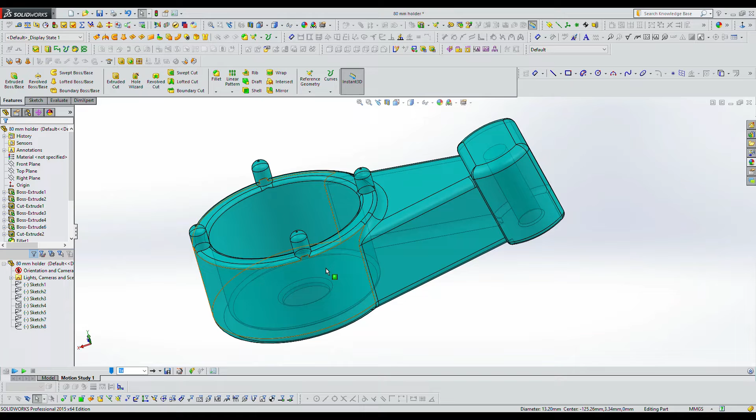Here's a cup holder that I'm designing for a wrought iron chair. This is a model of it in SolidWorks. It's a transparency, so you can sort of see the inner features as it rotates around.

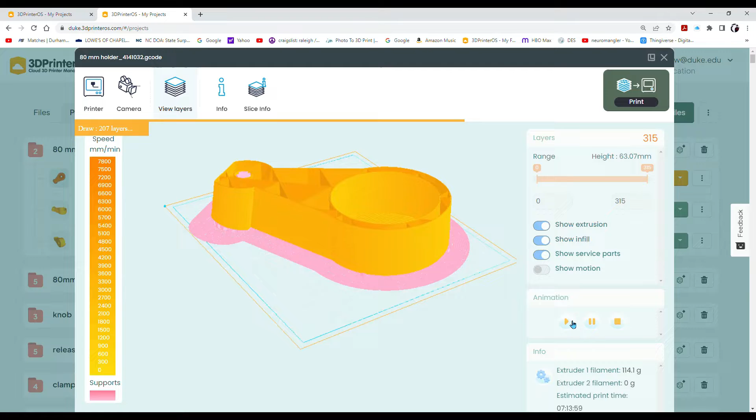Next I'm going to show the 3D printed simulation of the part. It's called the 80mm holder, due to the inside diameter of the cup holder. It's also got a little angle to it because the part that it clicks onto on the wrought iron chair is at an angle.

So here I'm just starting off drawing it on the fly. I'm making the inner diameter, of course it's 82, giving it a few millimeters extra. Next I'm extruding it. This is the basis of the design here.

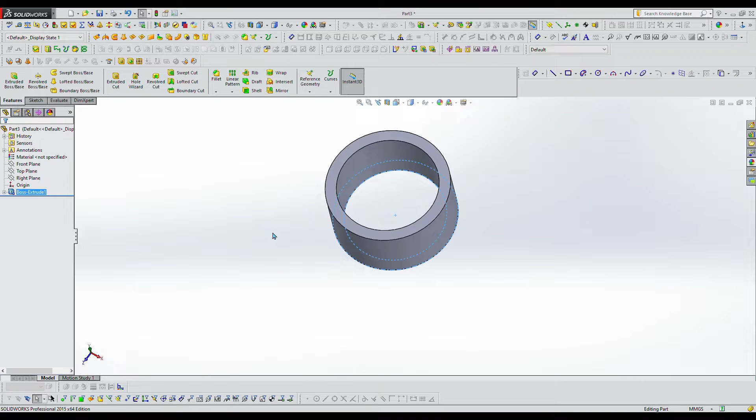Then next I'm going to be drawing the angled attachment for it. So here I'm drawing some lines that I can reference, and I'm going to tell that to be 10 millimeters offset there. Then I'm going to be sketching a surface that I can extrude and draw on and work off of, that's at an angle different than the angle of the cup holder.

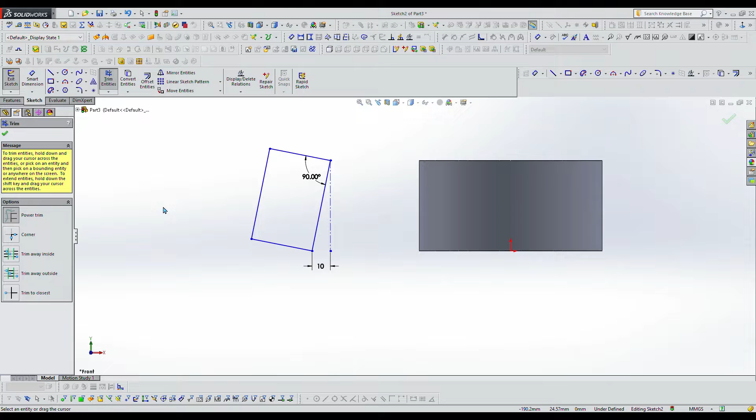So there I've got a rectangle drawn at an angle, and I'm going to extrude it in 2 directions, and then I'll be working off of that surface. I'll whittle it away as I go. I just wanted something to work off of that's the proper angle.

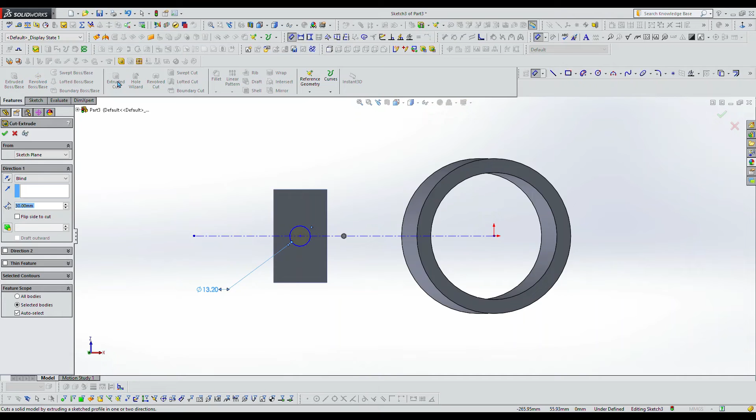So now I'm working on the back of that, that's at an angle. I'm going to cut in the 13mm hole there, giving it a little extra clearance. That's the part that's going to slip down onto the wrought iron chair.

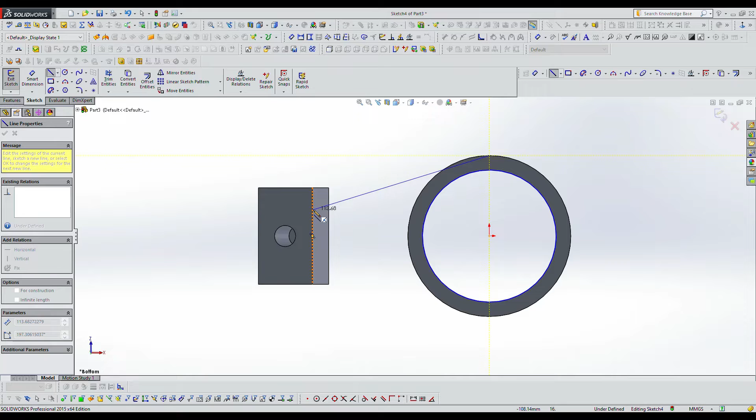Then I'm just going to connect the 2 pieces together with a little bit of sketching. Basically I have to sketch some parts and then extrude them and join them. That will join them up.

I'm just kind of doing this sort of freehand. Don't really have any numbers I'm working on other than the dimensions of the cup and the dimensions of the wrought iron chair stub that sticks up. The rest of the stuff I'm just kind of winging it.

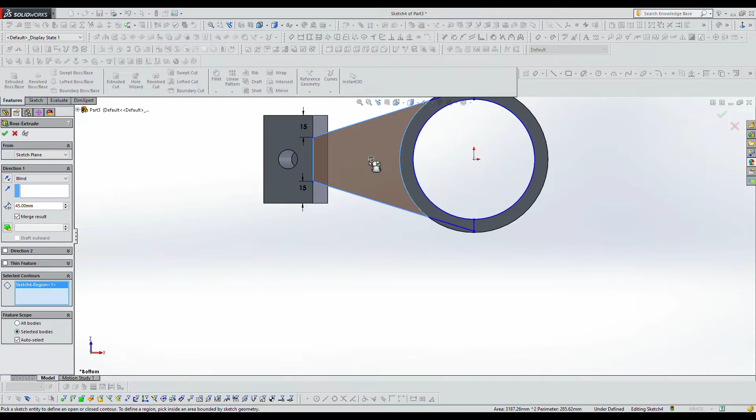So right now I'm just drawing a sketch that I'm going to be extruding, and there it is. It's extruded into the 2 parts, and so it joins them together.

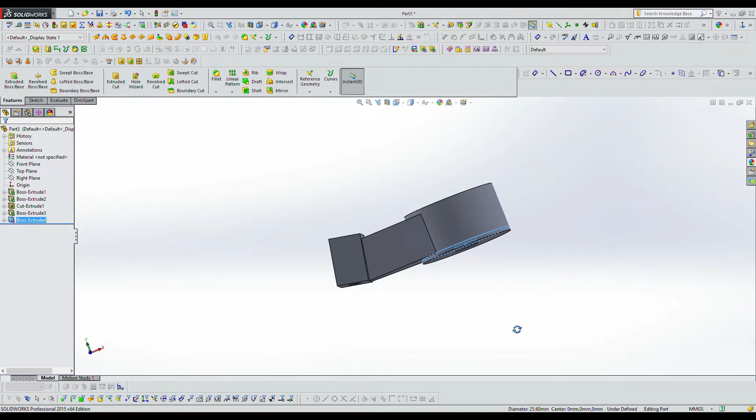From here I'm going to be filling in the bottom of it, and I'm going to put a hole in the bottom so any spilled liquids could drop out. I decided to extrude it up into the cup instead of out of it, so I'm going to go

back and change that because I want a flat surface. It's basically for when I'm running it through the 3D printer, it's just a lot better to not have it be that way.

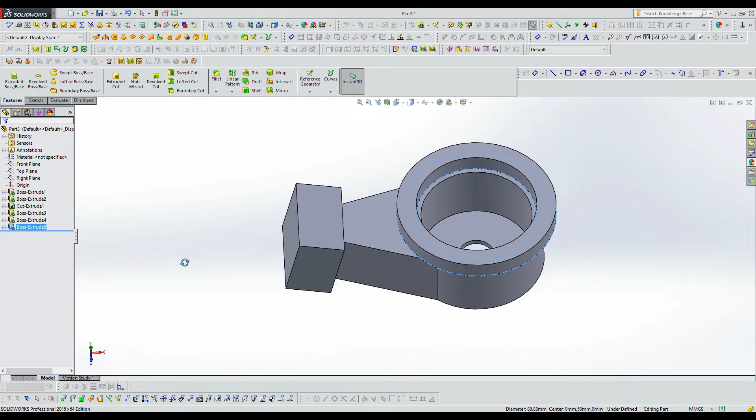Here I was thinking about putting in an upper ring that's larger. After I saw it, I decided I didn't like it, so I got rid of it and decided to just put 4 posts in so it could sort of guide the cup in as you're putting it in.

Also, if you've got a cup with a ring on it, it won't be in the way as much. So I'm just sketching 4 posts that I'm going to extrude up.

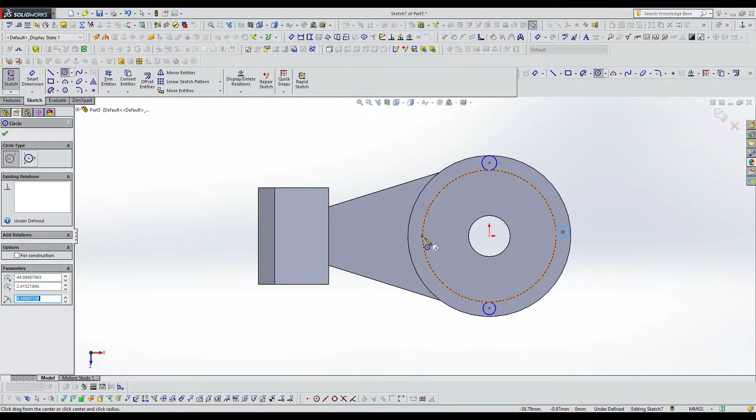Not sure how, I can't remember. I think I extrude them up 13 millimeters. We'll see in a minute. Right now I'm just centering them up and getting them so they don't overlap with the extrusions.

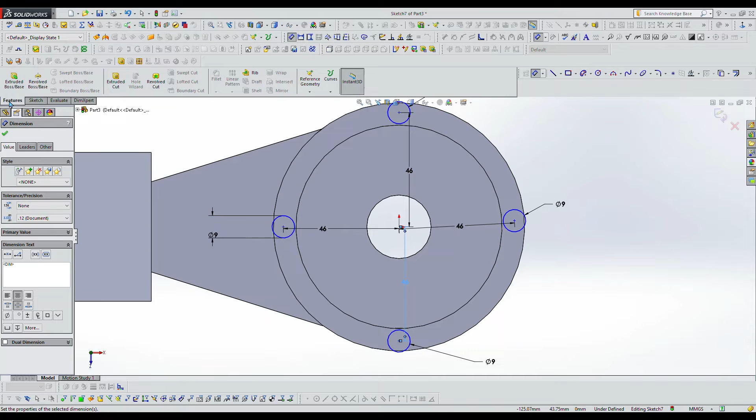And I think that's about it. Got it, there we go. Yeah, it's 13 millimeters up. And then I'm going to round that over.

So the next part, I'm sketching on the back of this. I really want to get rid of the bulkiness of it. So I'm going to be sketching some pieces that I'm going to extrude away or cut away.

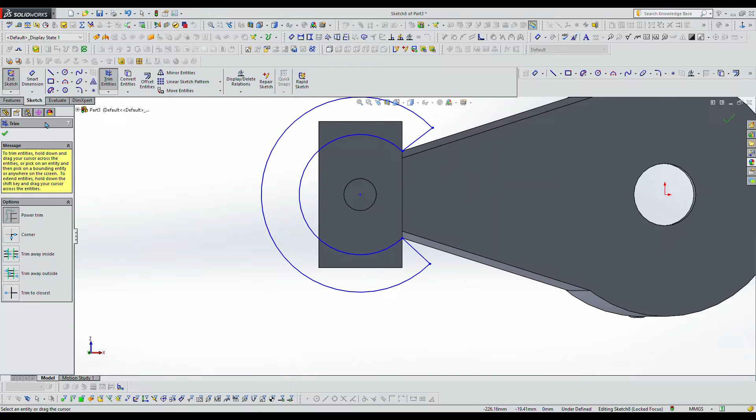And so that's all this is about right here, just drawing some parts, a sketch of parts that are going to enclose and be erased. And so there it goes right there. I'm going to extrude, cut that, and trim it down a little.

And then from here on out, it's basically rounding over the edges and doing some chamfering and fillets just to kind of round it off and get rid of the sharp edges. Sometimes the fillet radius is too large for the part, so I have to come back and change it up. I'm just kind of looking it over right now.

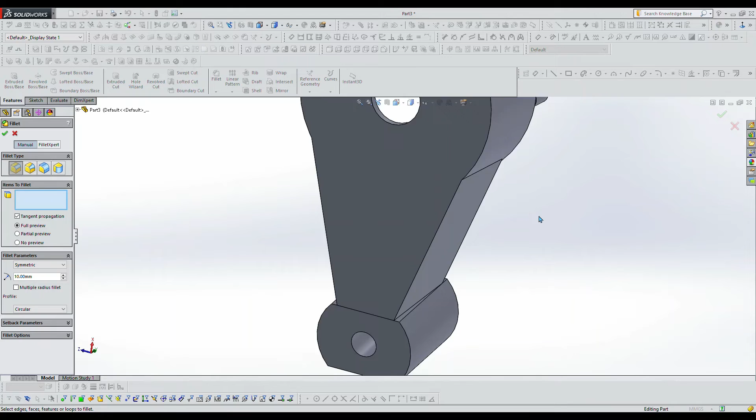Or maybe I got interrupted, I can't recall. So here we go, we're just starting to throw in fillets, just to get rid of the sharp edges.

I round it over more on the top than on the bottom because you get a better result with the type of 3D printer that I'm using. If you round it over too much on the bottom, it leaves it pretty rough and you have to do some sanding.

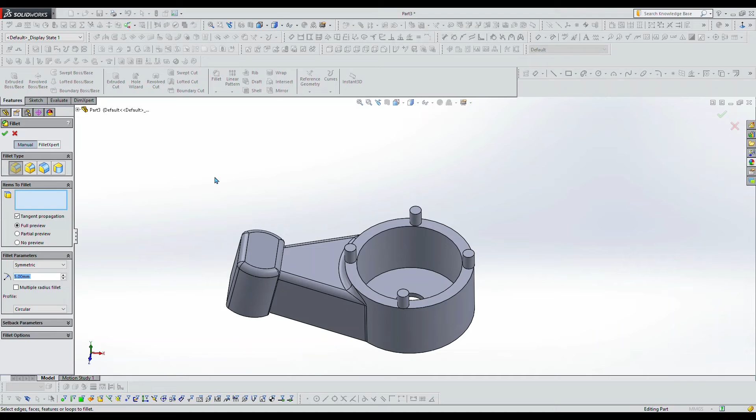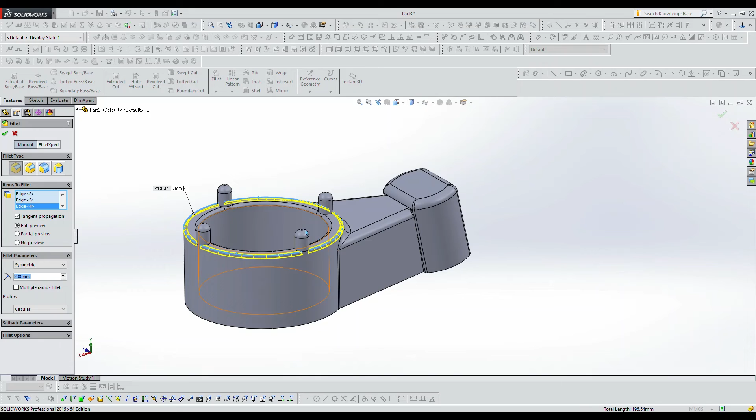But I expect in the future, when the 3D printers get better and less expensive, it won't be that much of an issue. But right now, when I'm doing designs that I know will be 3D printed, a big consideration is the process it's going to be 3D printed in, and sometimes you want to select the process that's going to result in a working part.

So I'm just going through there and putting in the radiuses and the finishing touches on it. Yeah, I think that's about it right there.